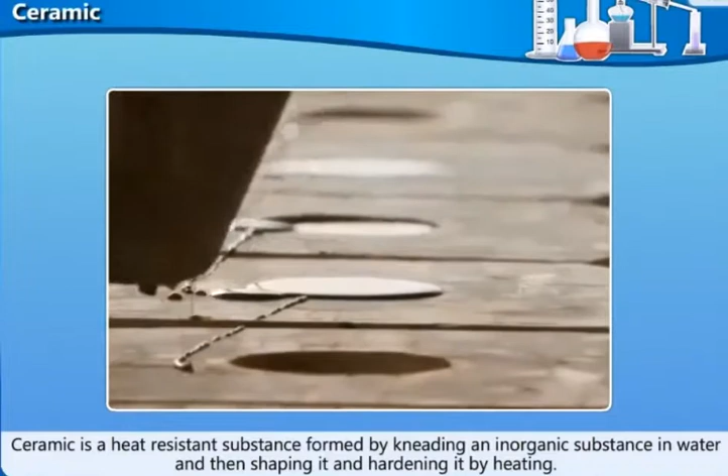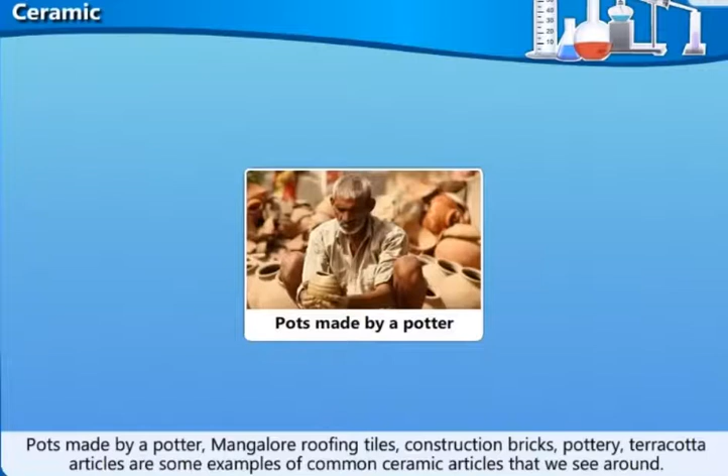Ceramic is a heat-resistant substance formed by kneading an inorganic substance in water, then shaping it and hardening it by heating. Pots made by a potter, Mangalore roofing tiles, construction bricks, pottery, and terracotta articles are some examples of common ceramic articles that we see around.

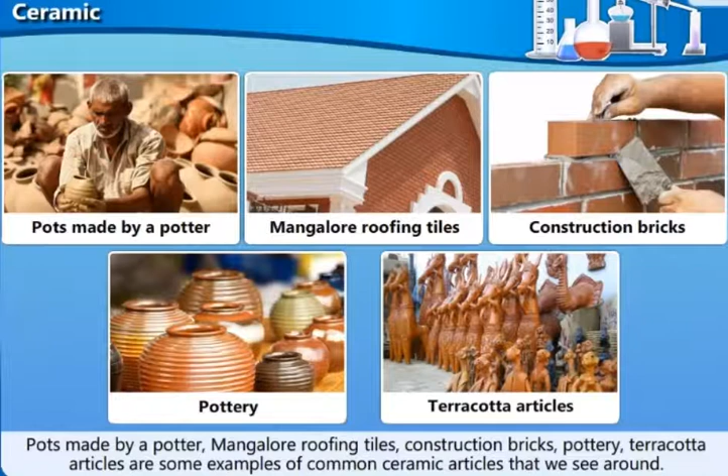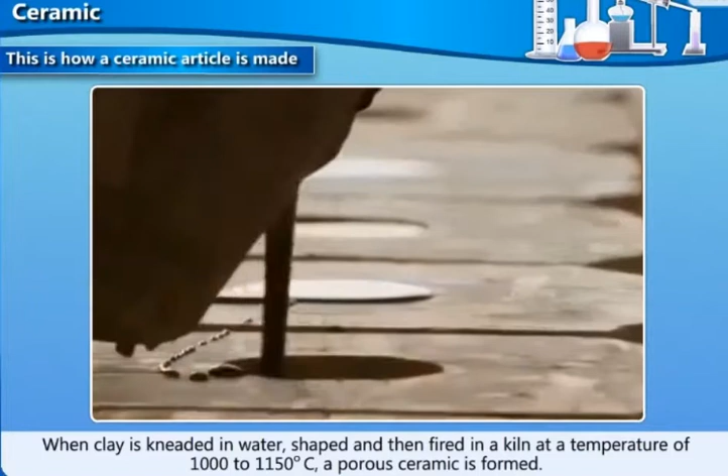This is how a ceramic article is made. When clay is kneaded in water, shaped and then fired in a kiln at a temperature of 1000 to 1150 degrees Celsius, a porous ceramic is formed. To overcome the porosity, the fired object is covered with finely ground glass powder suspended in water, glaze, and is then fired again. Fired means it is heated. So, because the ceramic article is porous, porous means there are small holes in the ceramic articles.

Remember, you have seen a normal, ordinary water pot, no? In the summer season, when we drink water from the matka in the villages, it is nice and cool. Why? Because there are small pores on these earthen pots which we cannot see with the naked eye, and this water keeps coming out through these small pores. The heat needed for evaporating the water is taken from the pot, and that's why the water in the earthen pot becomes cool, like in your body when you give out sweat through the small sweat pores.

Now you have small holes in your skin, but you cannot see those sweat pores or sweat openings with the naked eye. Can you see it with your naked eye? No, but you know they are there, because without sweat pores, how can the sweat come out through your skin? It cannot come. There are holes, but we cannot see them with the naked eye, just like the sweat pores in your skin.

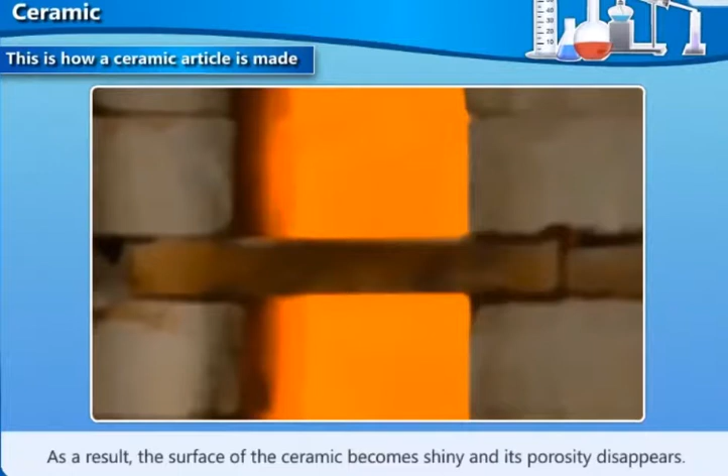And secondly, as we saw, because there are these small holes, they give a glazing, using a glass powder. They take a glass powder gel or solution, suspended in water, a suspension of glass powder. They mix the glass powder in water, and that is coated on the ceramic to block those small pores. This is done for special ceramic pots, not for the ordinary drinking water earthenware pots. It is specially meant for these high-end ceramic articles.

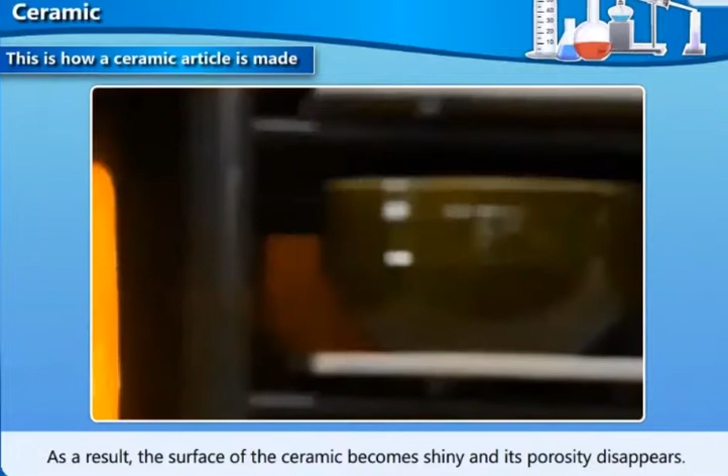As a result, the surface of the ceramic becomes shiny and its porosity disappears. Porcelain is a hard, translucent, and white colored ceramic. It is made by using the white clay called kaolin, found in China.

This kaolin was first discovered, as you all must have learned in a lower class, near Mount Kaolin. There was a mount, a small mount. It's a mount, not a mountain. Mount is just like a small hill. Mount Kaolin, which is found in China, is where it was discovered. That's why this white clay is also called China clay, because it was first found in China.

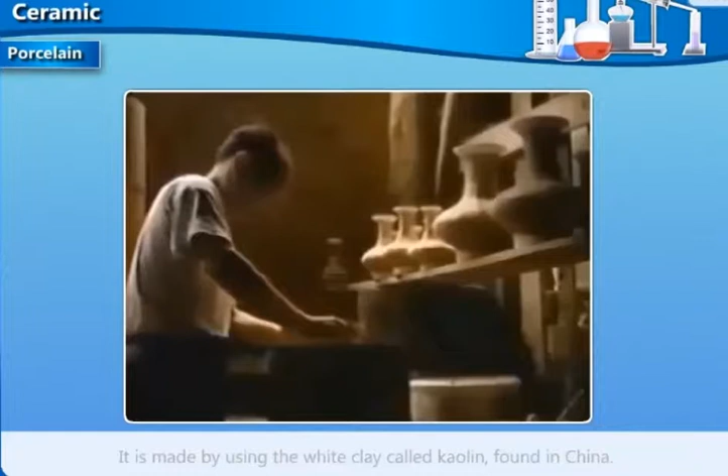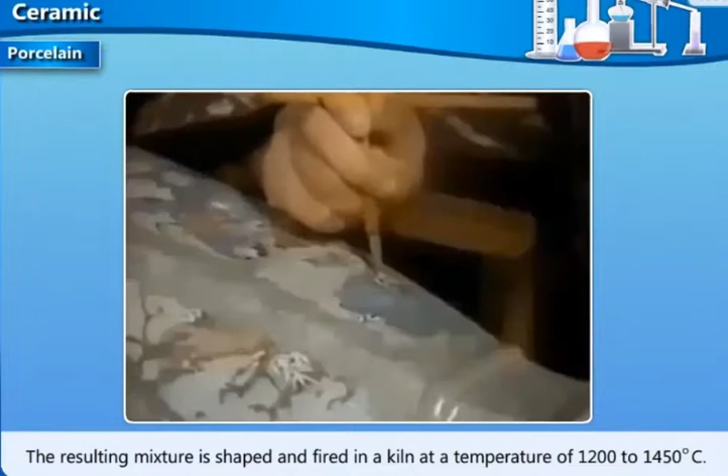Glass, granite, and the mineral feldspar are mixed with kaolin and kneaded with water. The resulting mixture is shaped and fired in a kiln at a temperature of 1200 to 1450 degrees Celsius. On firing again after glazing, beautiful articles of porcelain are obtained.

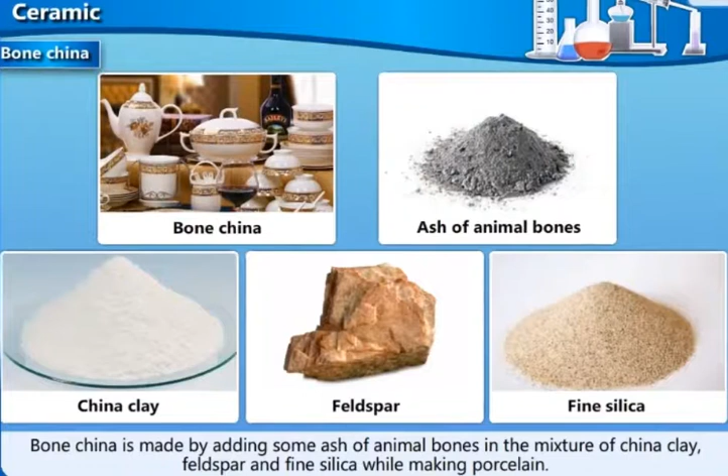Bone china is made by adding some ash of animal bones into a mixture of china clay, feldspar, and fine silica while making porcelain. This ceramic is harder than porcelain.

But bone china is much more stronger than porcelain, because while making porcelain, we also add bone powder. We take bones of animals, powder them, and add it. We all know our bones are the strongest substance in our body, even stronger than steel. They are very very strong.

So when you add this bone powder, the porcelain article becomes much more stronger. That's why articles made from bone china are stronger than porcelain. So porcelain and bone china are basically the same thing. The only difference is that in bone china we add powdered animal bones to the porcelain mixture. Dead animals' bones are taken, nicely powdered, and put into the porcelain, and that's how you get bone china. So the ceramic article becomes harder.

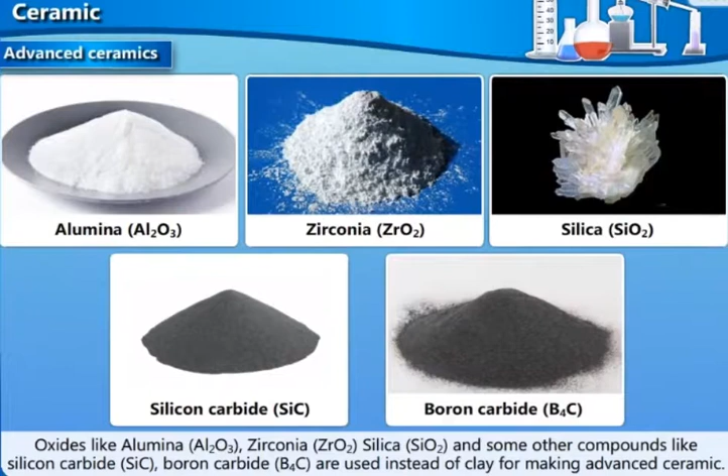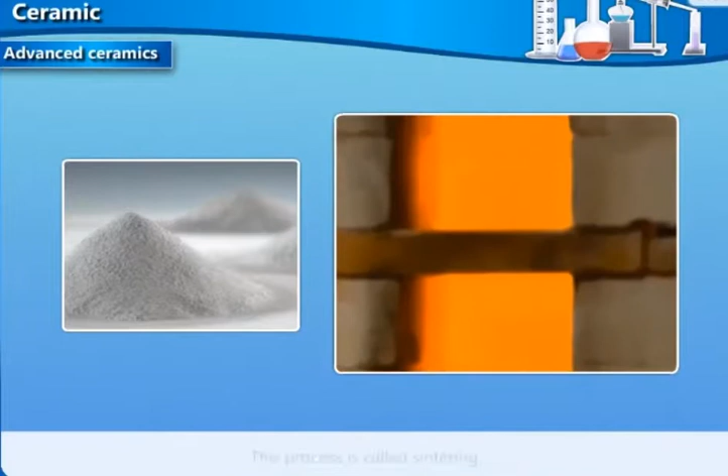Oxides like alumina, zirconia, silica, and compounds like silicon carbide and boron carbide are used instead of clay for making advanced ceramics. This ceramic requires a temperature of 1600 to 1800 degrees Celsius and an oxygen-free atmosphere for firing. This process is called sintering.

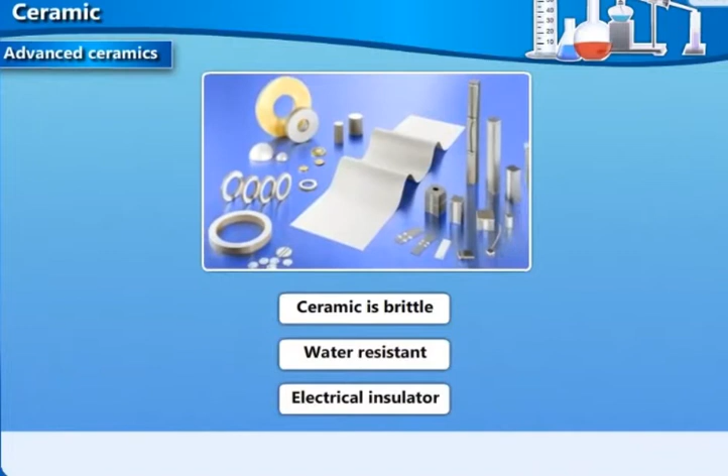Ceramics can withstand high temperatures without decomposing. Ceramic is brittle, water resistant, and an electrical insulator. So you all know ceramics are brittle, right? Brittle in the sense they break, though they're very strong and hard.

If I take a cup, you know ceramic articles, your chai ka cup and saucer that you drink tea from, that is made of what? That is ceramic, made of clay, china clay, whatever. So it is a ceramic article. They are very strong. If I take a tea cup or saucer and hit it on your head, would you like it?

No, you'll not like it, you'll get hurt badly. It is hard, but the problem is it is very brittle. Meaning if you drop the tea cup or saucer down, it will break into pieces. It is strong, but at the same time brittle. Just like glass is very hard and strong, but glass is also brittle. So there are things in this world which are hard, but brittle.

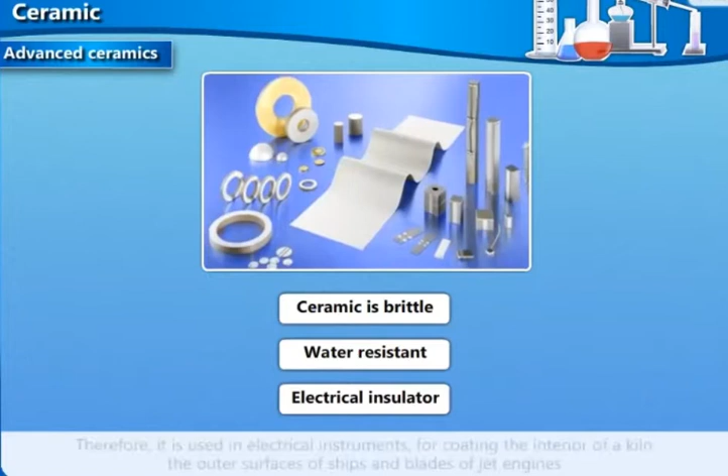Therefore, ceramic is used in electrical instruments, for coating the interior of a kiln, the outer surface of ships, and blades of jet engines. Even in the olden days, the electrical fuse wire was kept in a cartridge made of ceramic clay. It was covered with ceramic, kept in a ceramic casing.

Nowadays we don't use fuses anymore, we use MCBs, miniature circuit breakers. But even fuses, because ceramic is an electrical insulator, do not allow electricity to pass through it. Ceramics are bad conductors, electrical insulators. That's why they were used for making electrical fuses, and even now we use them for making electrical appliances.

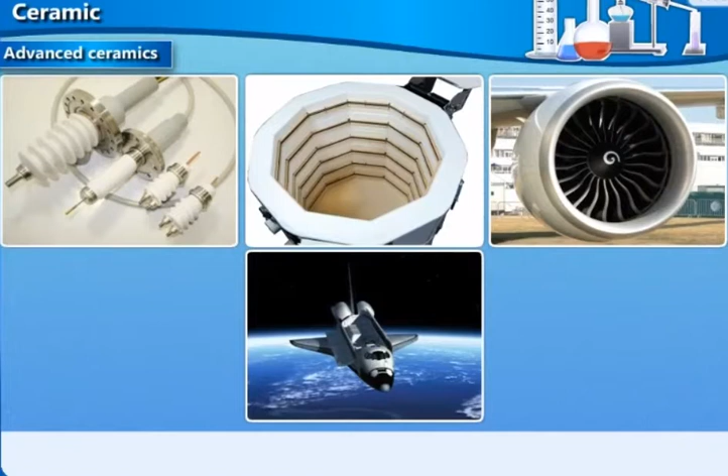A certain type of ceramic tiles are fixed on the outer layer of a space shuttle. Some types of ceramics are used as superconductors.